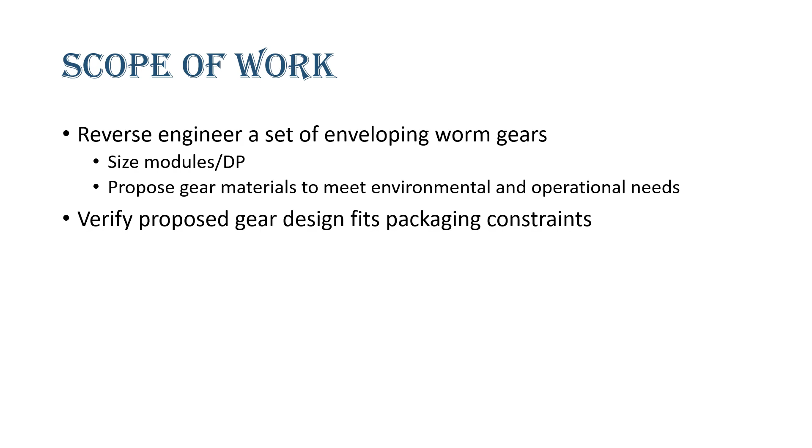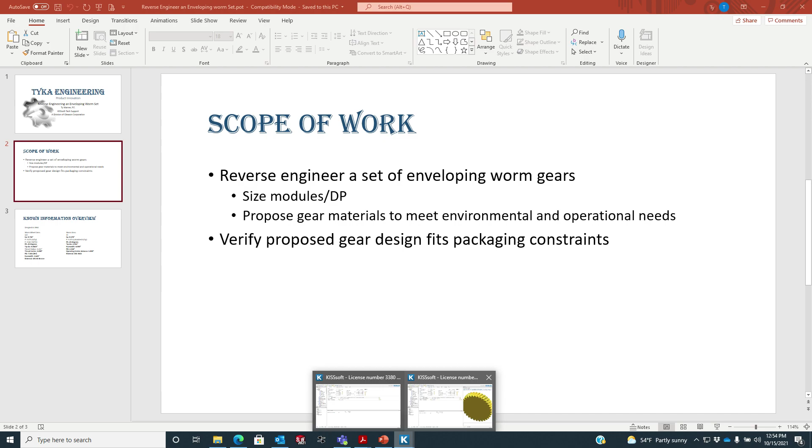I do know that I do have some numerical information about what this particular gear set is as far as size, pitch diameter, tip diameter, that kind of thing. Okay, so here we have our KISSsoft. I'm going to open this up. Now we're going to start fresh.

Alright, a couple of things we do know we have, and that's this information here. We're looking at the known information, which is in this bolded information here. We know it's 33 teeth. We have a circular pitch, the tip diameters, the throat centers, this sort of stuff. We think this is the throat radius. I think it might be a little bit big, so we might have to look at that. And we have some worm dimensions as well.

We've got the circular pitch. So there's two ways to calculate this. We're going to go with pi over the circular pitch. We can also go with the number of teeth over the pitch diameter, which is here. But this is a reference, and it doesn't work like that for the worm. So we're going to go with this top one and assume that this is our normal diametral pitch.

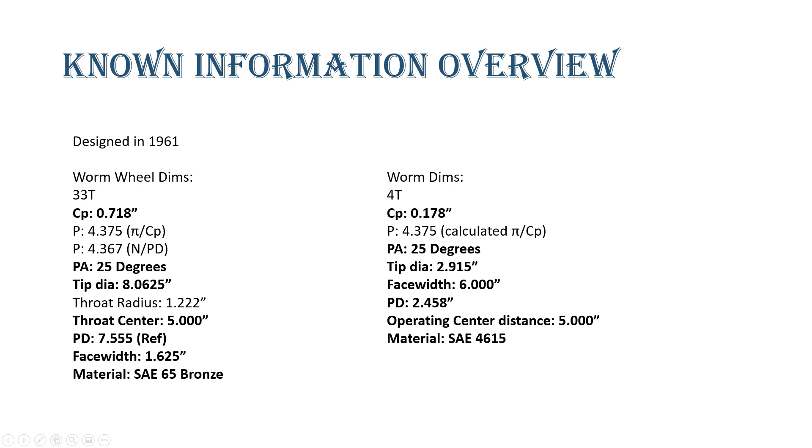And we have some other information here. 25-degree pressure angle, tip diameter is 8.0625. We've got face width, and we have an operating center distance. The material is defined here as 4615 and SAE 65 bronze.

Alright, so this is axial transverse, and what we're given is the normal diametral pitch. Actually, we calculated it, and remember what we calculated was 4.375. That's the normal. So we're going to put in the normal diametral pitch 4.375 and calculate this. Here's a transverse module. Okay, so we accept that, and I might not want to see that in transverse module.

I don't normally want to see module stuff when I'm working in the imperial system, so I'm going to go up here to the module specific settings. I'm going to put input of normal diametral pitch instead of normal module. I'm also going to check don't abort when geometry errors occur, and the reason I'm doing that is because I don't know exactly what kind of errors I might run into trying to put this together. I'm going to allow a large profile shift.

Is there anything else I want to do in here? No. Sizings, no. Calculations, I can calculate with the normal module instead of an axial module, which would be the transverse. What does that change up here? I don't know. Safety factors, generation, we might have to do something with that. So here's my normal diametral pitch. So module specific settings, input of normal diametral pitch, don't abort when geometry errors occur, allow large profile shift, calculate with normal module.

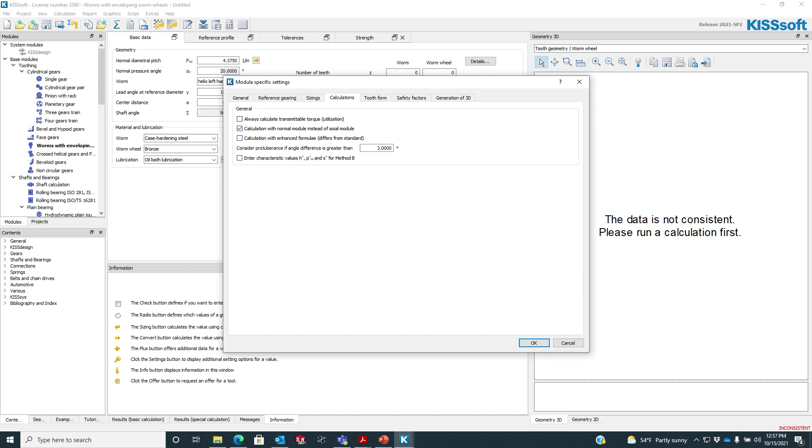We know that's a 25-degree pressure angle. I don't know if I had it in there, but it is a right-hand threaded worm. It's 4 teeth on the worm and 33 on the worm wheel. We know that the worm is 6 inches long, and the worm wheel face width is 1.625. The center distance is 5 inches. They told us that. It was in the drawings.

It's a 90-degree angle on the shaft. We really don't need the strength, so I'm going to turn that off because I don't know what the loads are.

I want that material change, and I had a 4615, and I want to know what the equivalent of that is. So if I go here and I look at an equivalent chart, I can see 4320 is here, and if I come back into here, I can find 4320 right here. I accept that. And if you didn't have 4320, you can't find it, always go up to your extras, configuration tool, materials, and make sure you're in the AISI standard. Alright.

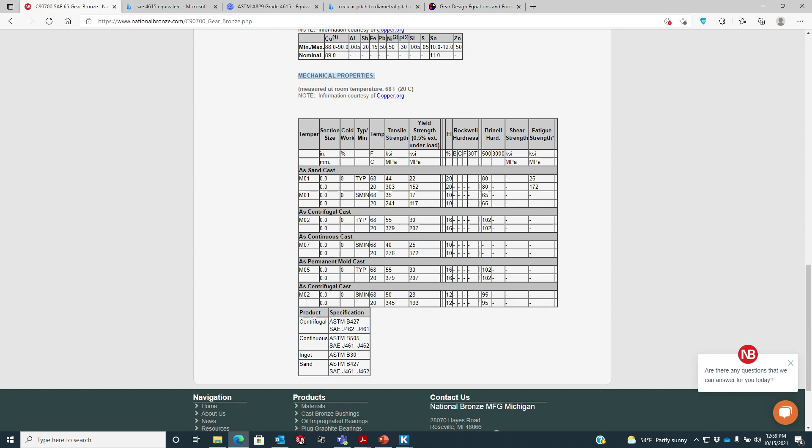Bronze, we said SAE 65. Again, I'm going to look at an equivalent. SAE 65 is a 907, and really here what I'm looking at is this information for tensile and yield. So 4422, 5530, this would be a centrifugal cast. That seems to be the best information for that. So I'm going to go with this 5530, and when I go in here I'm going to just, oops, wrong one, I wanted the bottom one. I'm going to grab this.

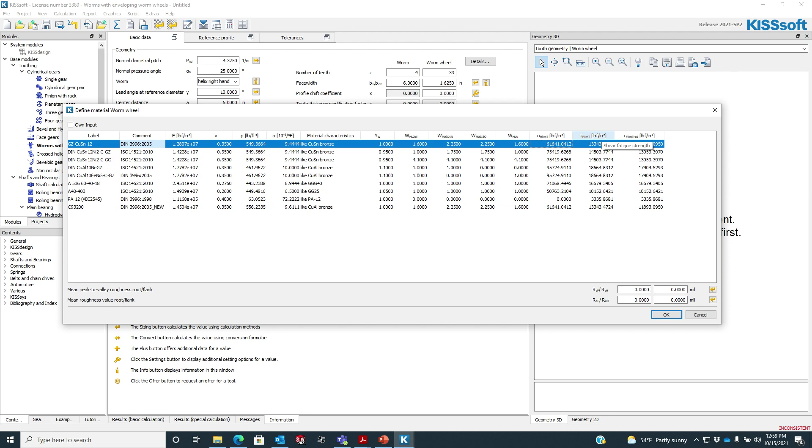You can see I've got a 932 in there, but that really doesn't hit the numbers I need. 5530 was the number. So I'm going to grab this top one here. That's pretty close. And this is for the shear fatigue. And that's going to be less than, it's at roughly 50% of the shear strength. So I'm okay with that. And so that'll be my material here. Oil bath, VG220, I'm not going to change that.

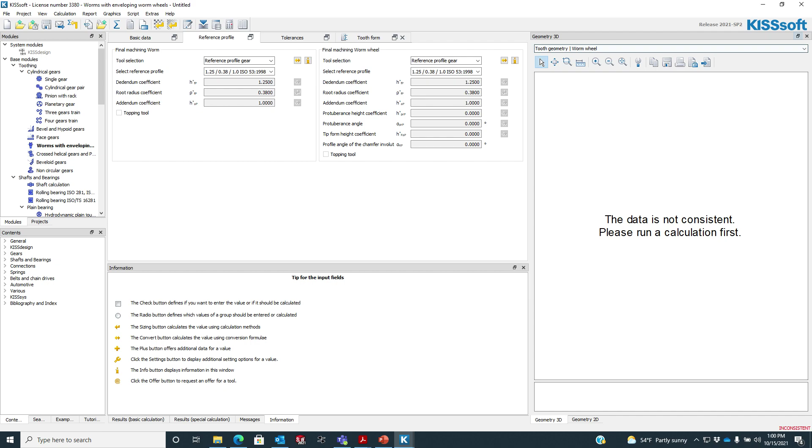So this is some information that we just kind of start out with, and we don't have what the load case is. So what we're going to do now is we're going to turn on this tooth form as well. All right. So in the basic data, we have this information we've plugged in. We can run this. We didn't even change anything in the reference profile, and we don't have the right center distance. So nothing worked, right? Well, let's look at the reference profile. We're going to start with the profile A. Let me get rid of this. Right here, and profile A here.

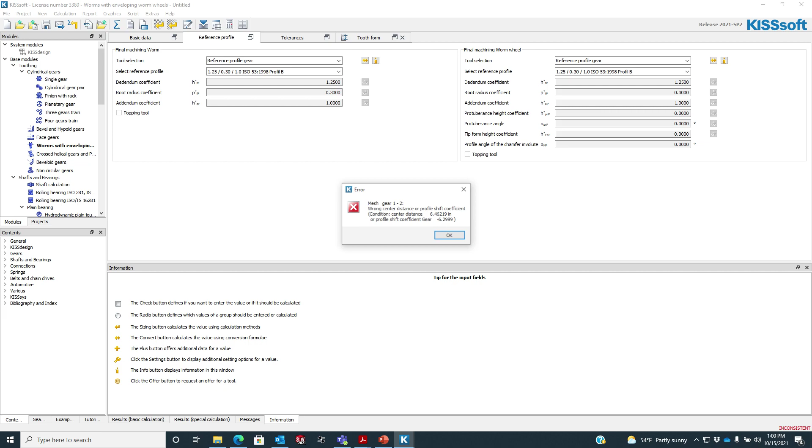But you saw right away that it's telling us, based on the information we have, a 0.38 in the root is too big. And it says a max at 0.317. So we still want to stick with a common profile. And if we go down here to this 0.3 for both, we should get rid of that warning, and it goes away. Now it just tells us that our center distance is terrible. Alright. Tolerances, worm according to Niemann, worm wheel according to Niemann, I think those are fine. If you have other tolerances you want to use, feel free to enter those at your own input.

I didn't get an overpin measurement on these, so we're going to go back to the basic data tab, and now we need to size this stuff. And what we need to do is we need to size this based on the operating pitch diameter. So we're going to look at this lead angle at reference diameter right here. We're going to convert this. We're going to select from the reference diameter and center distance. The reference operating diameter, this is for worm 1. This is for the first gear. Okay. 2.458. That's our operating reference diameter, 2.458.

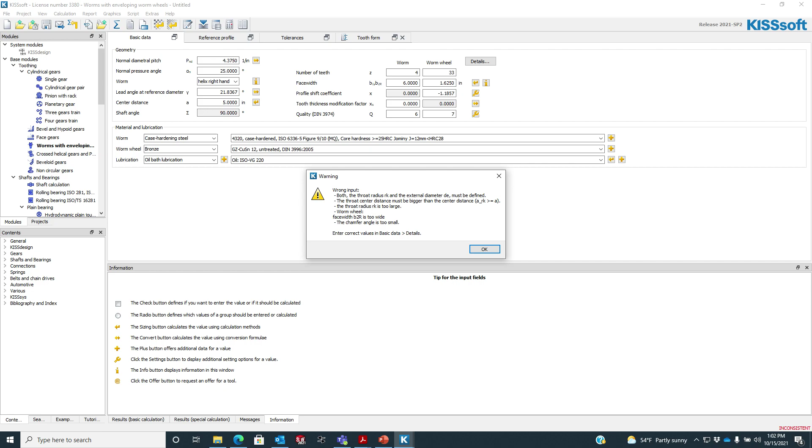So we're going to come back into here. 2.458. We know our center distance is 5 inches, and we calculate 21.8367. We say accept, and now we're going to run this again. Okay, now enveloping worms have a throat radius, and they have some other things we have to define. So now we get this data warning right here. Okay. Well, we can see that the worm operating diameter is 2.458. That's what they gave us. And the worm wheel is 7.542, which is slightly different than 7.555. But this is a reference number, so I think I'm okay with that.

We're going to go back and we're going to look at this a little bit more. So first we're going to go into these details. The throat radius, we said it's 1.222. I think that's a little bit big. The throat center distance is 5. It's the same as the operating center distance for the set. The external diameter, all right, this is for the worm wheel. What do we put here? 8.0625. So we put this 8.0625. We're told there's no chamfer on this at all. So the gear design does not have a chamfer, which is fine. And we're going to run it without a chamfer. So we say none. Okay?

We're going to run this. It runs good. Let's look at the graphics on the meshing. Alright. This cannot be calculated. Please run with a tooth form activation. Let's run this.

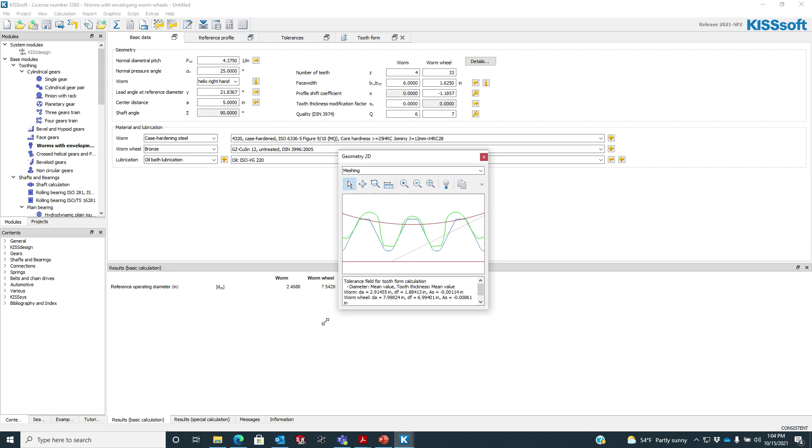Here's the mesh. Here's the worm. Here's the worm gear. And let's see, what do we see here? The worm diameter is 2.914. And the worm wheel is 7.998. So the worm wheel at 7.998 is small. And the worm diameter at 2.914, where does that look here? 2.915, it looks correct. Yes? I'm good with that. So we hit the right diameters.

It looks like we've hit the right pitch on here. And this is what that should look like. I will tell you that we're going to have to make this worm wheel diameter a little bit larger, 8.0625. And there's a couple places we can do this, but I recommend we do this in the reference profile right here. We can change this to own input. Okay. And we're going to look at this addendum coefficient.

The addendum coefficient for the reference profile is the tip diameter, 7.9991. We need to make this 8.0625. And if we calculate that and accept it, we're going to get this warning. So we've got 0.0248 clearance instead of 0.03. I don't know if that's a problem, but you can see this is the actual diameter of the worm wheel, because now it's 8.06159, and we need it to be 8.0625. Okay.

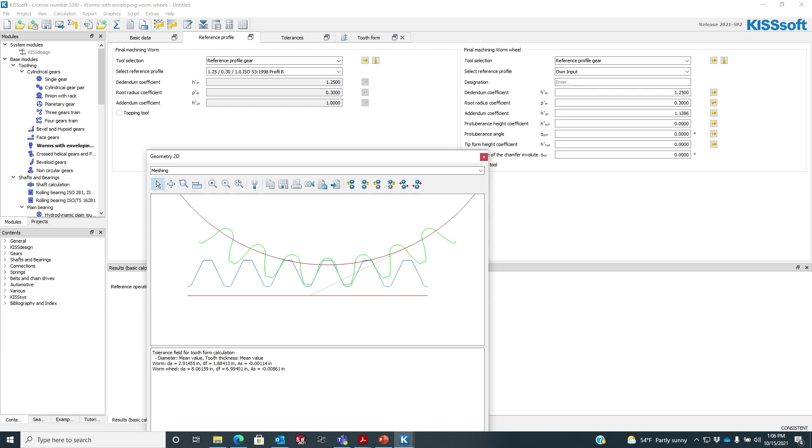And the worm diameter at 2.914, 2.915, it's pretty close. So here is the design at this point. Well, we've got to check that 3D information first, but right now I could buy that this is the design. You can see that there's no backlash in here at all whatsoever. And so there's probably going to have to be some information played around with in order to get the proper backlash that we want in the set. And that could be we make some changes here or there in order to get it.

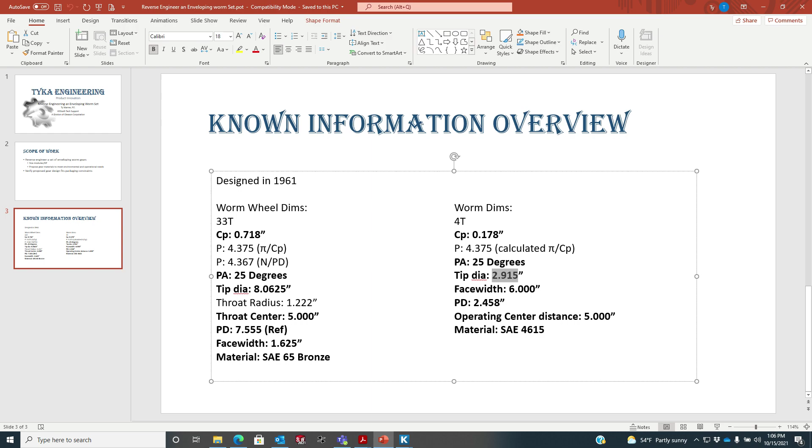So if we were to do another look at this, and they didn't tell us in the drawing, but let's say this is actually transverse. This is a transverse right here. And this shouldn't be the normal pitch, it should be the transverse or the axial. And if that was the case, we'd go up here to our module specific settings, change this off of here, and you can see our transverse diametral pitch is off.

And if we run this, you can see how things are a little different, right? Our worm gear diameters change and our worm wheel diameters change. And if we take this back to 1, alright, 8.03, that's pretty close, and 2.949. But remember, we calculated that, and we calculated 4.375.

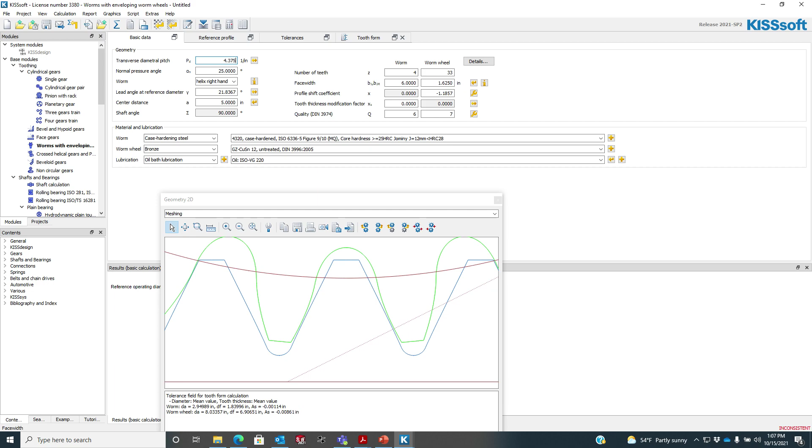Okay, we need to size it again. 2.548, I think is what it was. 2.458, with a 5-inch center distance, and then we have this lead angle. Okay, and now we have what I think looks like a much better gear design. The teeth are much better proportioned right here. We still have the right diameter here, 2.91455, but now our worm wheel is off, 7.99824.

Okay, transverse. We go back to reference profile. We're going to go to this addendum coefficient right here, and we're going to make this 8.0625. You can see it changes that right there a little bit. We run this, it's going to get taller, and we're not going to have enough meshing. That's a little bit pointier tooth. But this is the design.

This is the diameter, and this is the right diameter for the worm, 2.915. And we can play with that a little bit. So if you wanted to make sure it was exact, you'd go to own input, 2.915, it's there. That looks just like a rounding thing.

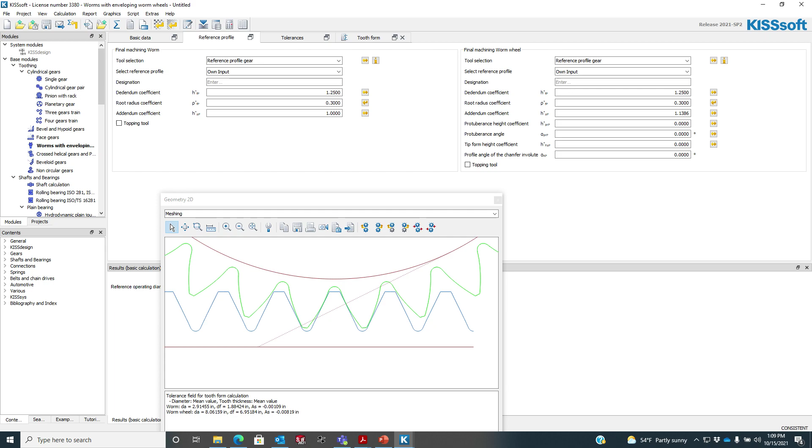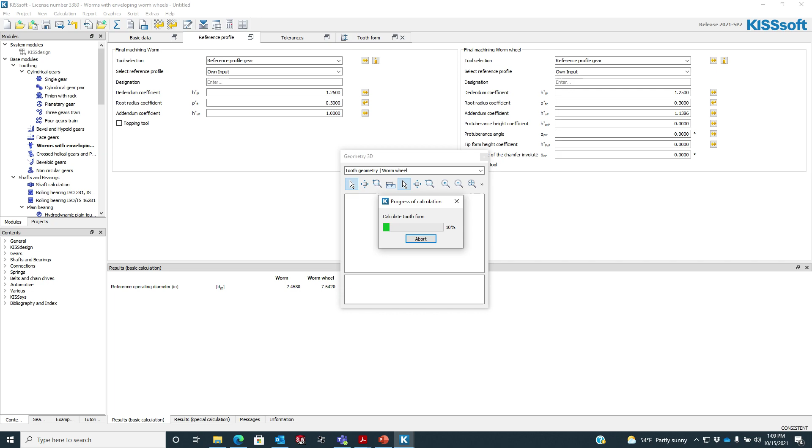Okay, so here's a mesh. Doesn't look too bad in my opinion. Looks pretty good. Let's look at the 3D graphics here, and let's look at the worm wheel. I don't know what this is going to look like yet. We defined that throat radius. I looked at it from the drawing. It could be big. To me it looks a little bit big. We'll let this calculate here in a minute.

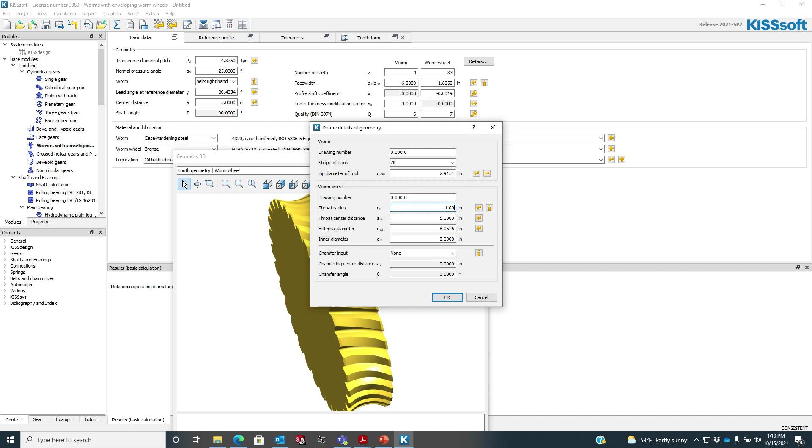Alright, so our gear, our worm wheel calculated, and that does not look right. It doesn't look right on the drawing. So we obviously have too large of a throat radius here. We know the throat center is good, so let's try this at 1.1 inch. That looks big to me. So at 1 inch, let's see what this does.

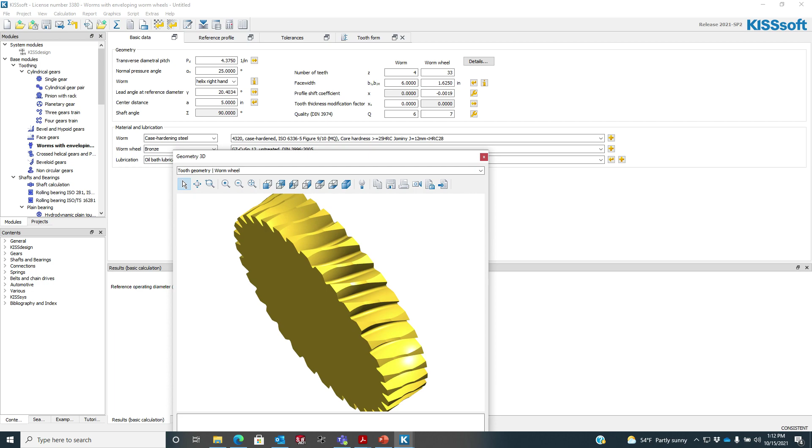Alright, so it calculated, and here is our new geometry, and when I look at the drawing or I look at the actual gear in hand, this looks like what it ought to look like. It looks like the actual gear. And if we look at the 2D geometry for meshing, this looks alright as well. We've got some backlash here.

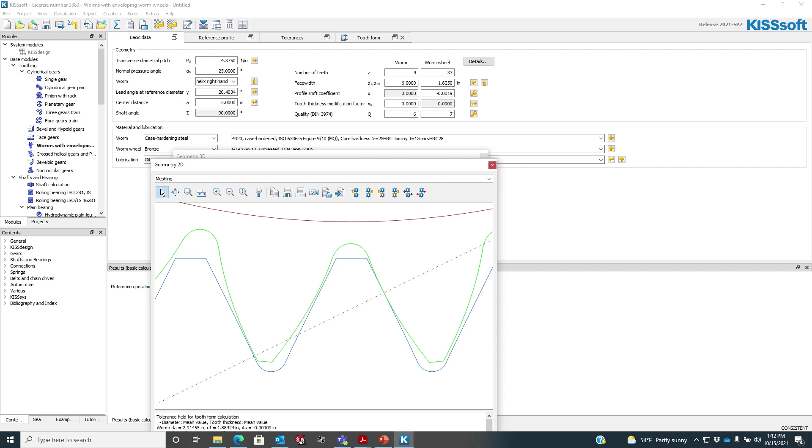Let's go ahead and just make a flank contact to the left. Now let's go to the right, I guess. There. We've got contact here and here. So what are our ratios? So here's our mesh. There we go. We're going to try to balance this out a little bit.

Okay. Now you see I got sharp edges on this worm, and the drawing says that I need to have rounded edges. The edges need to be broken off and not sharp. So I'm going to go to my modifications tab right here, turn this on, and then for the worm I'm going to add rounding. I'm going to click my little plus button here, and I'm going to give it 15 thou round on that tip. And now when I run this, well, crap, it's going to take a little bit, but we'll let this calculate.

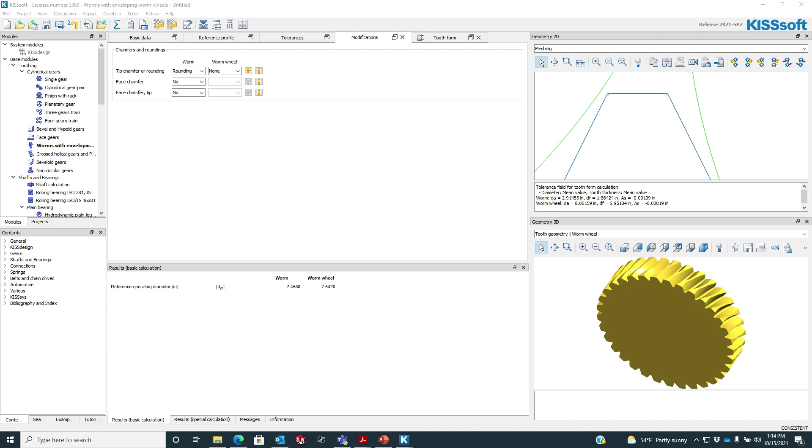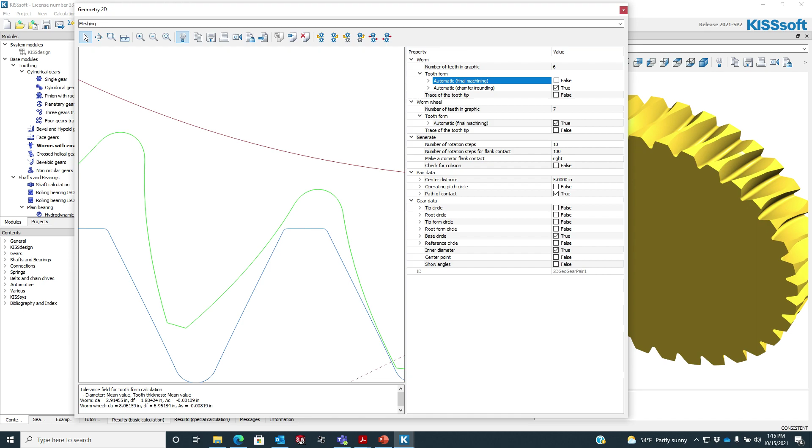Alright, that calculated through, and now you can see I've got a little bit of rounding here. I broke this edge. You'd have to look at the gear and decide if this 15 thou is enough. If I wanted to see the final, I'd have to turn this properties tab on and then go to this worm, turn the original off, and now you can see my round. Okay, and you can see, turn that off, and you can see the whole mesh here.

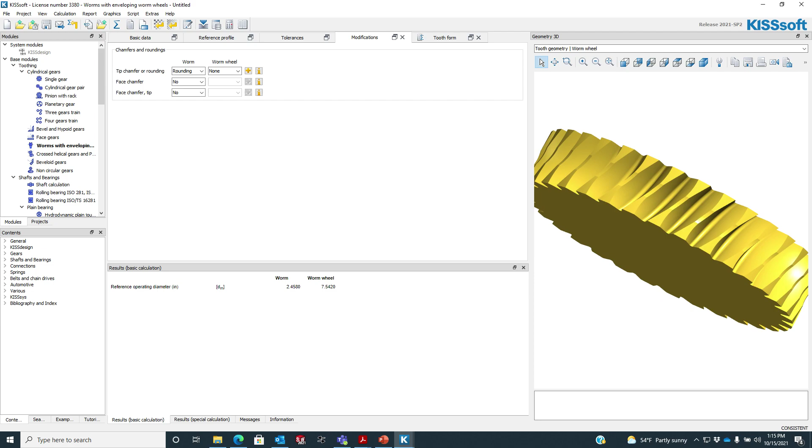Okay, so here's the mesh. I think that looks pretty good on a 25-degree pressure angle tooth. I don't know what this backlash is just yet. I'm going to look it up here in the report. This 3D model looks really good. I think this matches the gear that we had in hand. So that is good. So we can turn that off.

What we're going to do is run the report right here, the main report. And if you don't get the report up in this window, you can go to the report settings and make sure you turn this external editor on. Alright. So here's our report. Let's see, I have it unnamed, and that's fine. So messages, did we get any? Well, we had this message, gear 2 does not have enough tip clearance.

Well, it still has tip clearance, 24 thou versus 32 thou. So maybe that's not a problem, but again, we're just trying to make sure these gears match what we had in hand and what was on the drawings. There are things we can do here to fix that. We don't have any collision, so that's good. We're using this only geometry calculation. We're using the ISO 14521, which is fine.

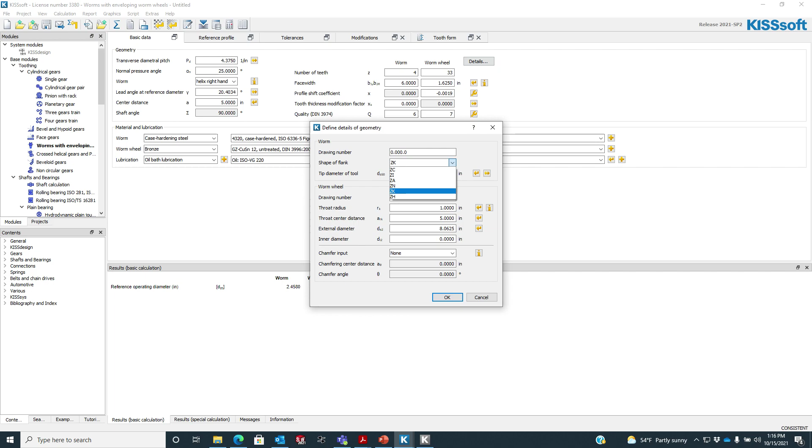We have a ZK flank, all right, and there's lots of different flank designs for a worm gear. If we were to look at this here in the details, here's the shape of the flank, right? ZI, ZK, ZA, ZN, ZH, and if you were really interested in what those meant, you can go to search and type in ZK.

Worms. So this goes over the types of flank forms, right? And you can go right down through this in the settings and try and figure that out. So it depends on how you cut it. It depends on, you know, if it's an involute, if it's concave, convex, that kind of stuff on these tooth forms. ZK is the default. All right. So you can change that if you need to. And of course, it's not defined on the drawing. Very rarely was it ever defined on the drawing.

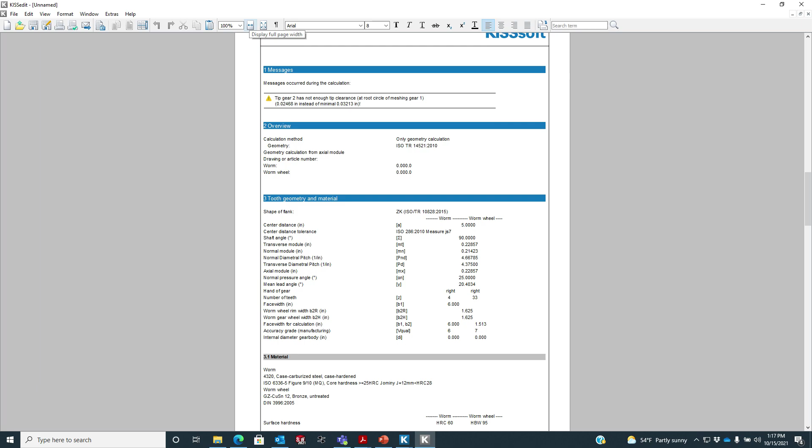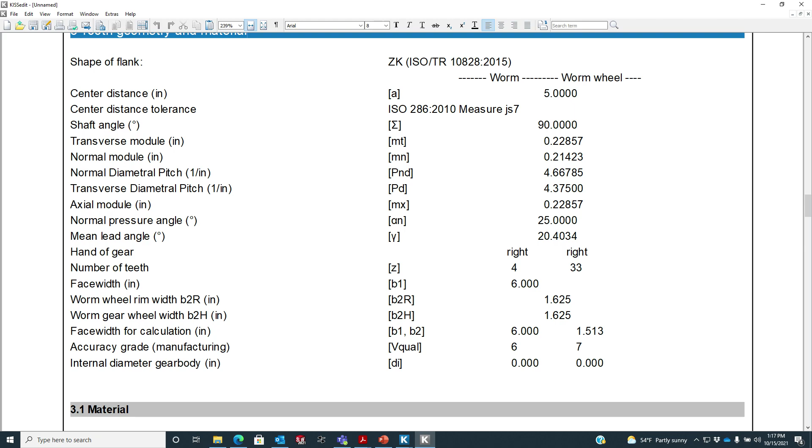So let's look at our drawing here. Our information. I'm gonna go ahead and display the full page width. We have our information here, our transverse, normal, and normal diametral pitch. Okay, here's our normal pitch, here's our transverse. Usually worms are defined in transverse or axial pitch, which is why I switched it in the middle there. We have our normal pressure angle, our lead angle, the number of teeth, the hand, okay, face width for the calculation. Here we have our materials,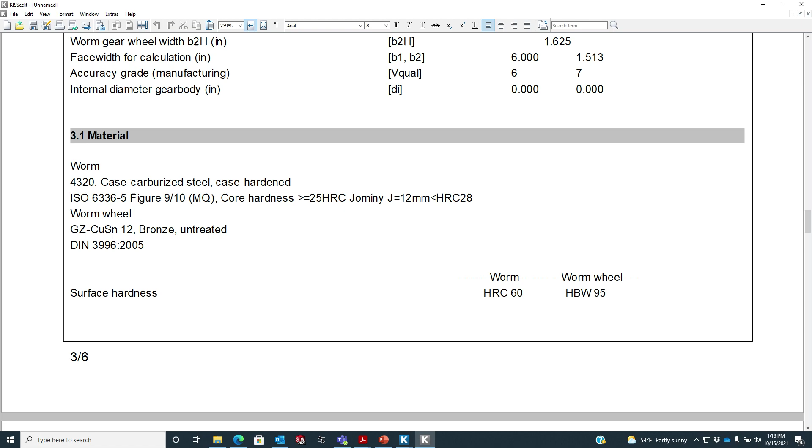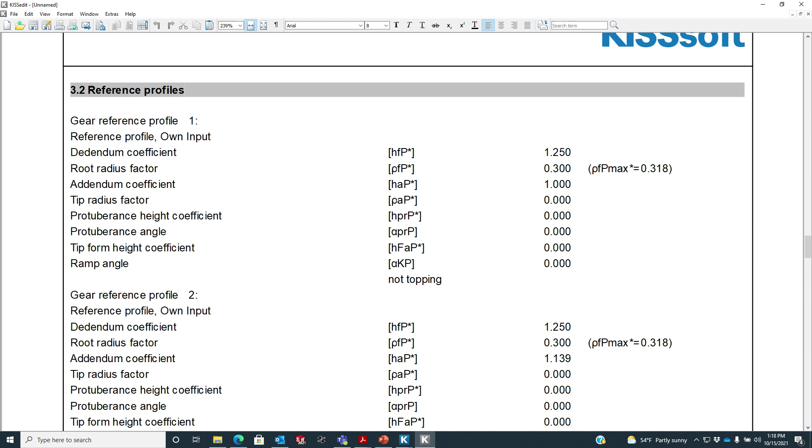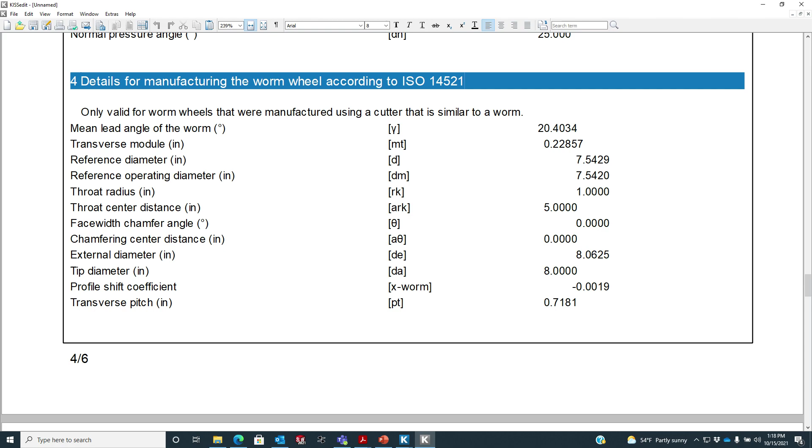the reference profiles. So this is a standard profile, so you have to be able to find a cutter out there somewhere. And this PF max, or ρfP max, is the maximum root diameter, or the root radius factor that would fit without collision. All right, that's what that means. Information on your final machining, and then here you've got details for manufacturing the worm wheel, throat center distance, face width chamfer. This one didn't have it in that case. External diameter, tip diameter. All this information is here.

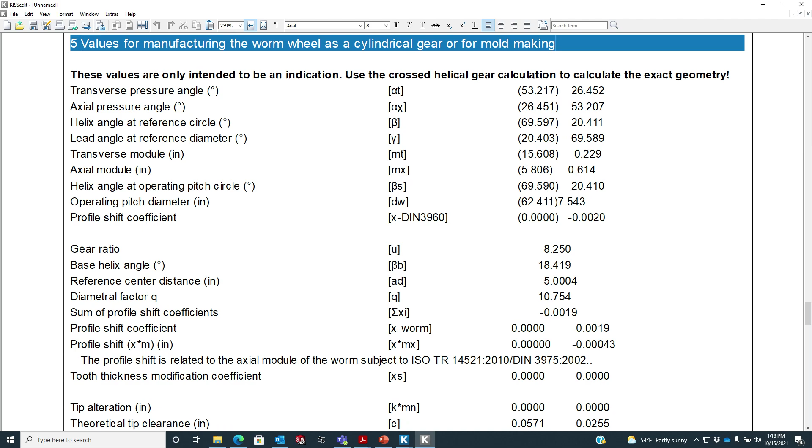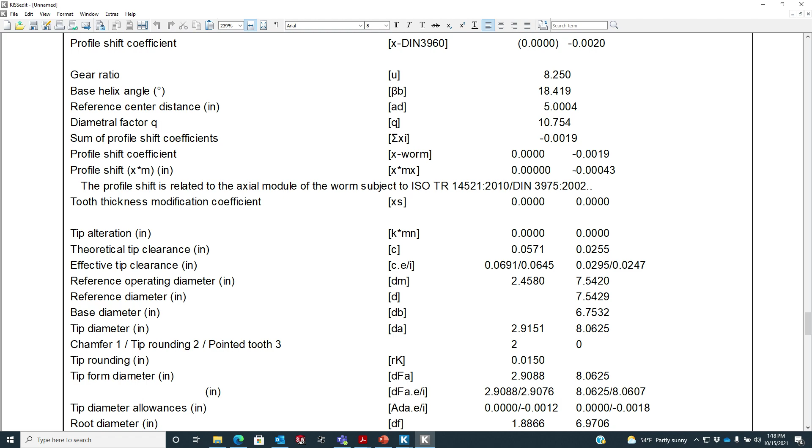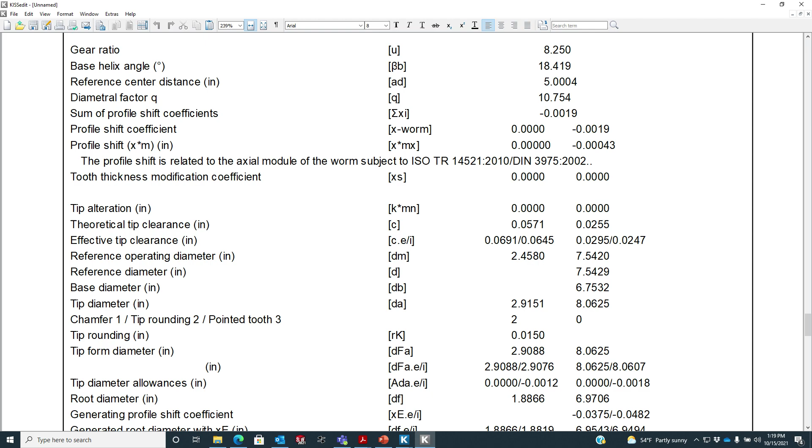And as we come down here a little bit, this is the worm wheel. So you have the tip diameter here, tip clearances. Here's my diameter. Here's my profile shift. Right here. Transverse module. Let's see, I'm looking for this tip diameter right here. 2.9151 and 8.0, and then here's my manufactured. Here's my tip radius, tip diameter, tip form diameter, tip diameter allowances.

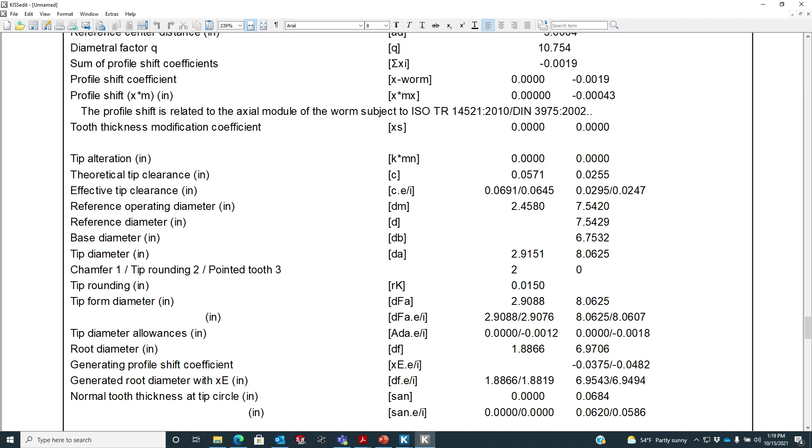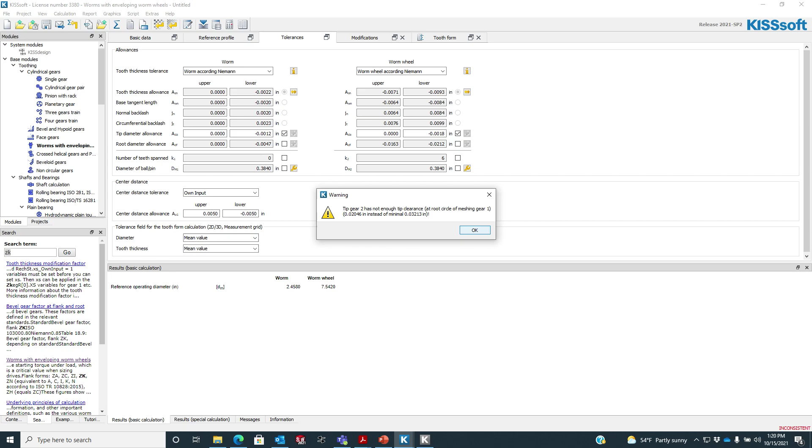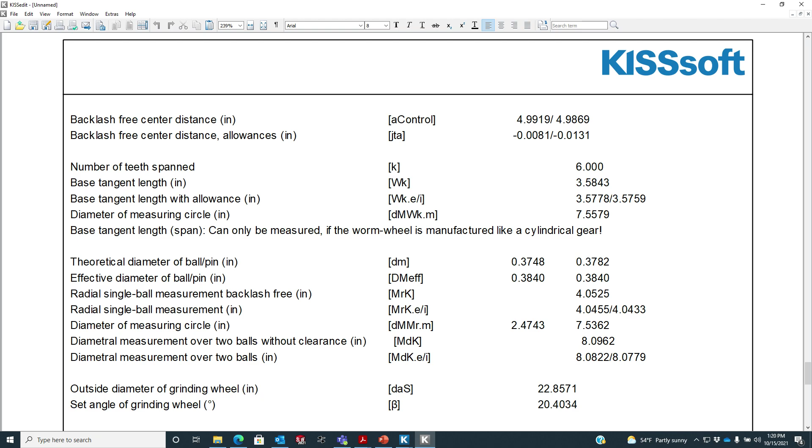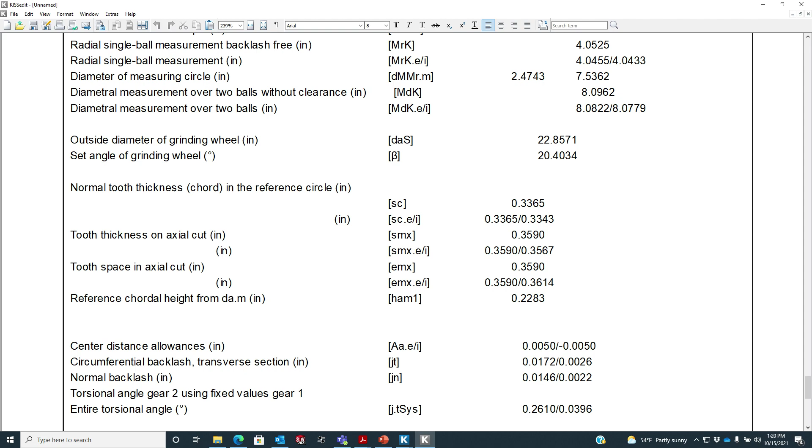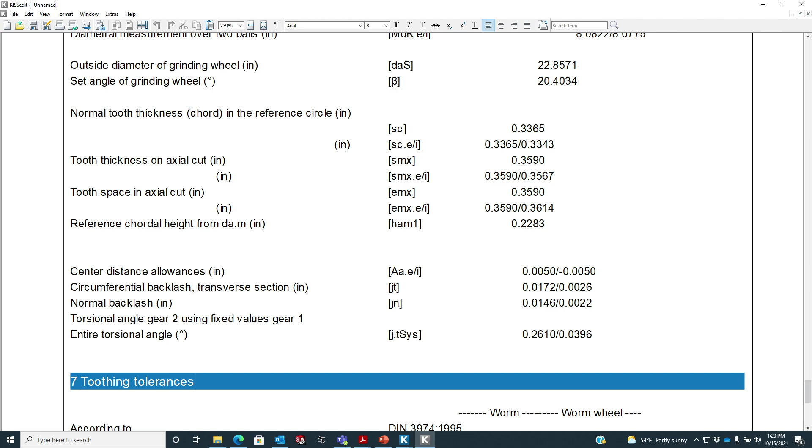It's not too bad, but here down for the tooth thickness now, I get my backlash free center distance, and then I have my theoretical ball over pins and my normal tooth thickness, normal backlash. So my normal backlash is anywhere from 2 thou at min to 14 thou at max, but that assumes you have a full plus or minus 5 tolerance on here. So here's the design. And did it actually work out?

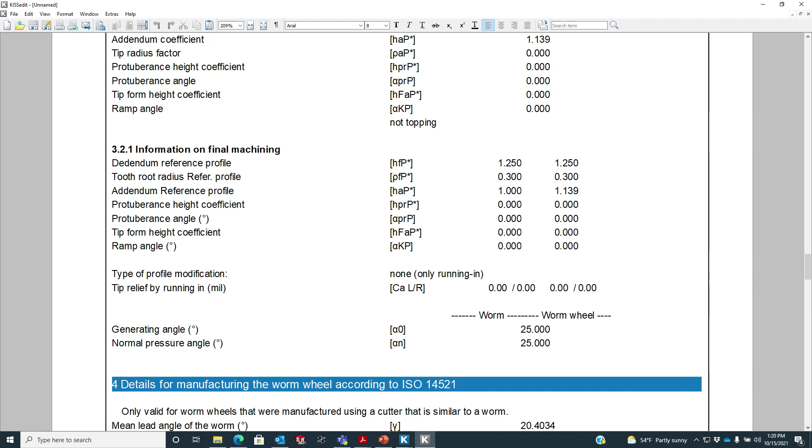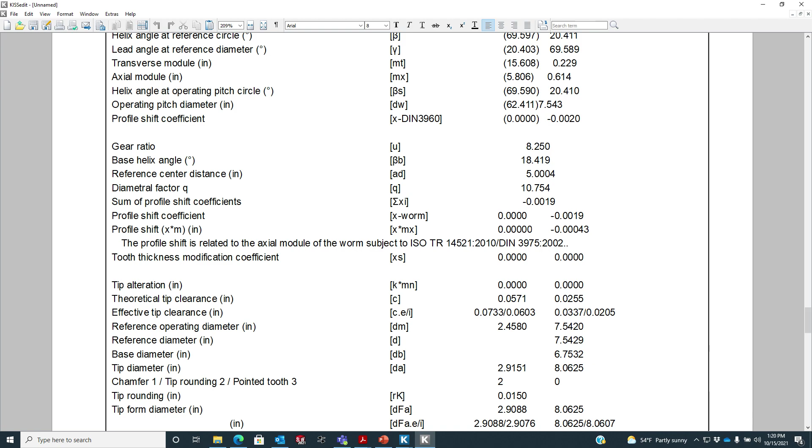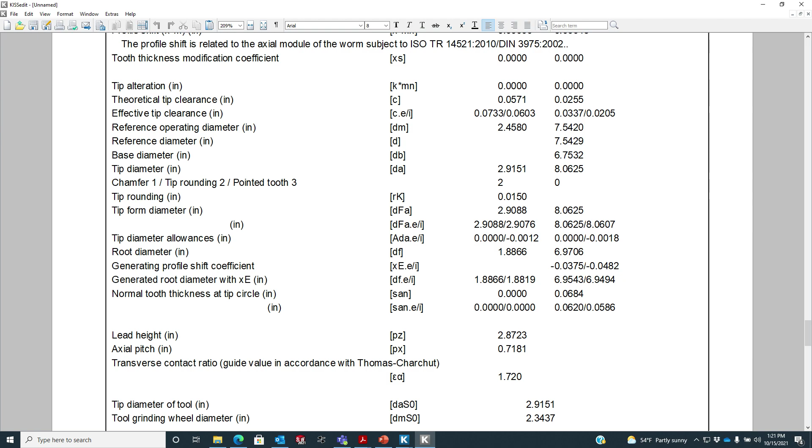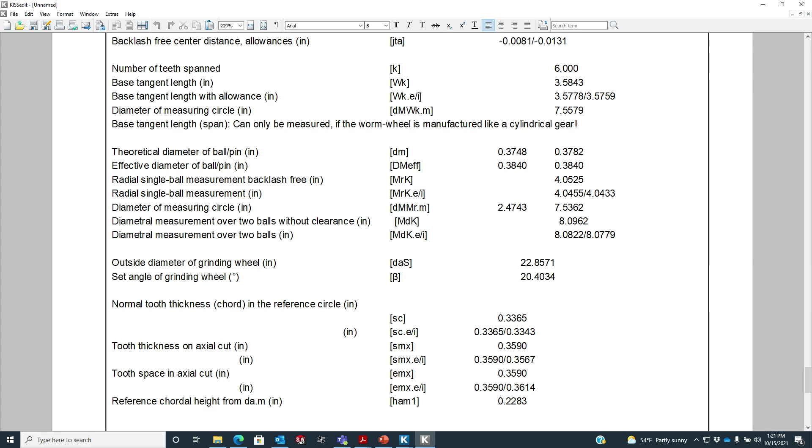Let's see, up here for the pair, we want to see the values here. So our diametral reference center distance, okay. There was an effective tip, reference diameter, base diameter, tip diameter was good. The generating is good. I'm looking for my reference operating diameter right here, 2.458, that's correct, and 7.542. Okay, it's not 7.555, it's 13 thou off, but that was a reference on the drawing. So this is probably as good as it's going to get. They could have done something crazy with their design to throw people off, but who knows. So this is a pretty good reverse engineered gear set at this point.

I'm going to save it, save file, save as, and again, you should save early and often. I'm going to save this as just a training example, right? And then if you're following along with this stuff, you can save if you want. It's a pretty good example for the worm reverse engineering module. Okay, let me save that.